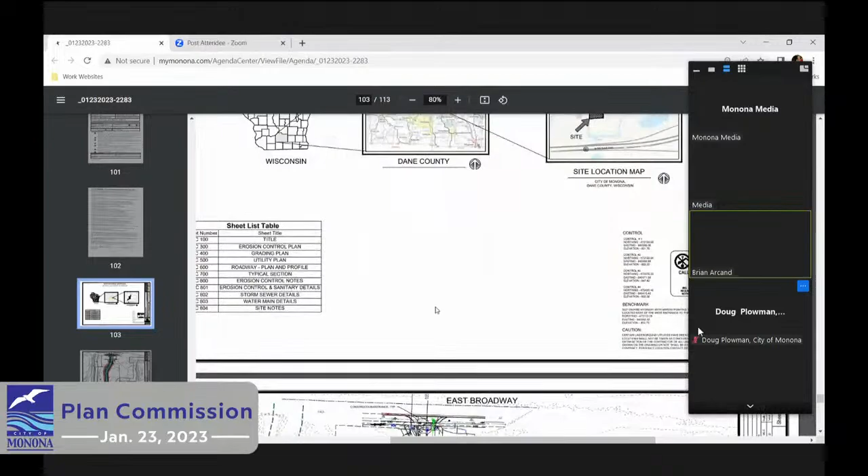Okay, so the project is located off of Broadway Avenue, west of Highway 51, near the existing Shell gas station. It is for the private drive that will serve 4 lots of an existing CSM that was recorded in 2019, I believe, which is being spurred by a development for Lot 1. So the conditional approval of the CSM required the construction of the private drive when the first lot is developed. So I'm representing White Horse, who will be constructing the private drive for this development on Lot 1. Stormwater for the private drive will be in a proposed bioretention basin on Lot 1 and will be combined with the stormwater for Lot 1, which is being designed by Vierbicher and Associates.

At this time, we had proposed public sanitary and water main, since this was serving multiple lots. But I see there were comments from Public Works, so Snyder and Associates weren't involved with the original CSM. So I wasn't aware that it had already been discussed that the city would prefer that these utilities be private. So we will head in that direction then. So there will be, but we do plan on extending laterals to Lot 4, Lot 3. We do not show laterals being extended to Lot 2. The intention was that the mains will be extended since we have no idea what kind of development is going to happen on Lot 2.

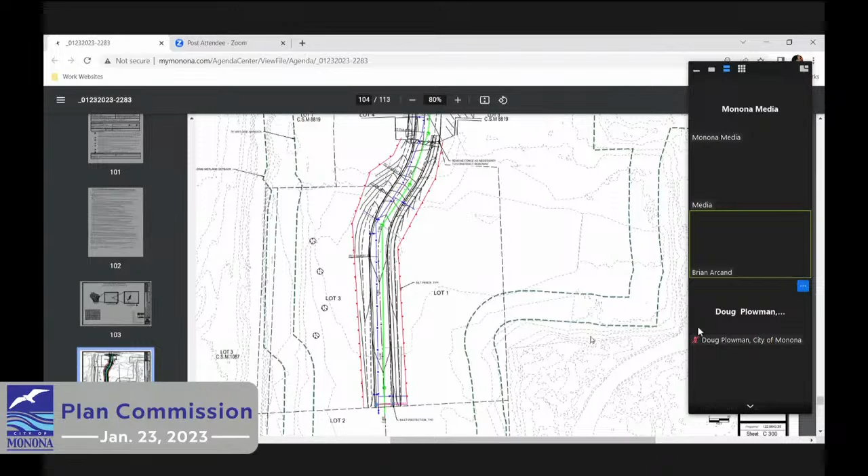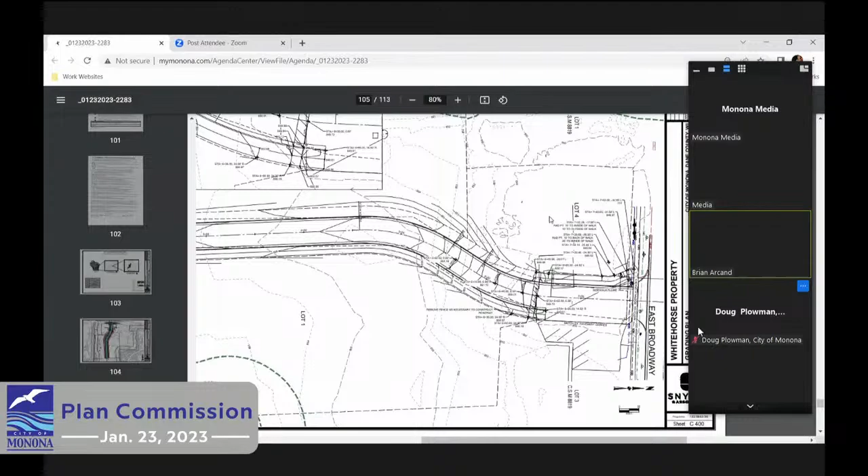And then we do show multiple laterals to Lot 1, which I saw in the engineering comments. Those were coordinated directly with Vierbicher. So that's why there's more than one lateral going to those lots. Our original design, the intent was not to affect the gas station here. And Lot 4 currently has a potential buyer who's working with a separate engineer on their layout. We tried to coordinate with them for stormwater management and grades and design, sidewalk location, that kind of thing. But they are still in the preliminary concept phase and we just didn't really get anywhere with them as far as putting a pond. We did look at stormwater, sorry, I'm kind of all over the place here.

We did look at stormwater for the entire CSM at one point, where we were showing a basin on Lot 3, but this same developer is looking at Lot 4 and Lot 3, and they didn't want to be locked into a pond location, which backed us off that and went back to looking at just Lot 1, since that's being developed, taking care of the roadway.

Now, I did see the conditional approval of the CSM included some geometrics, and I sent Doug an email regarding a 14-foot southbound lane, two 11-foot northbound lanes, and a 3-foot median. So we were looking at that this morning as well. I guess the main issue with that is it will require some coordination with the gas station, either tearing up a portion of their parking lot or adding an inlet over there.

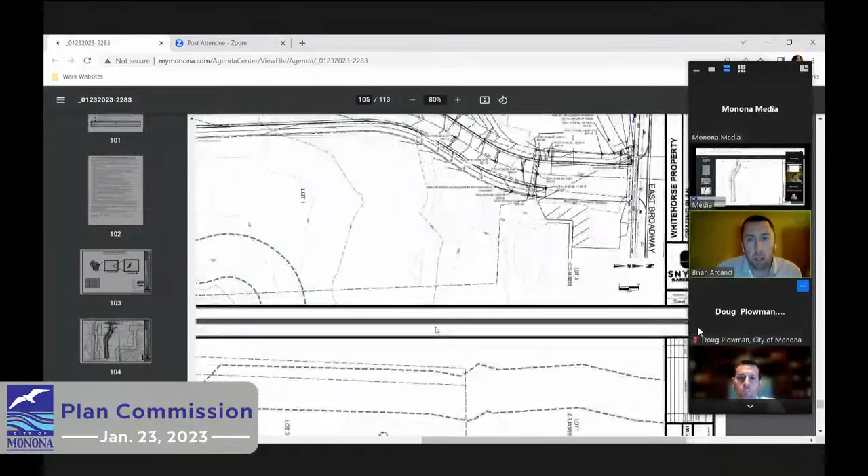So we'll have to reach out to them for some coordination issues on that. Okay, anything else? I believe that is it. I'm trying to see if I'm missing any other critical information here.

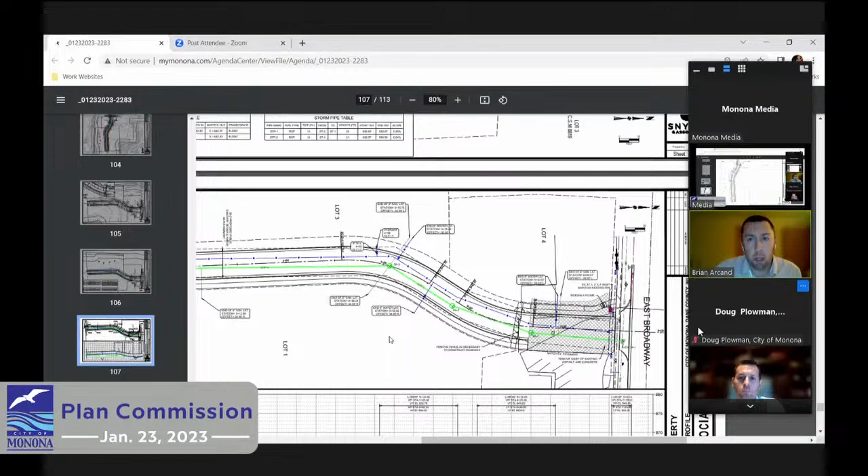No, is there any questions I can answer? Well, I'm sure we will have questions, but we'll wait for the consideration of action before we get to those. Okay, so is there anyone else here to speak on this during the public hearing portion?

Okay, then we're going to close the public hearing.

And we will go to 7F, which is consideration of action on the request by White Horse Properties LLC, represented by Snyder and Associates, Inc., for approval of a zoning permit for a new private drive for the previously approved CSM 16430, located approximately 1208 East Broadway, case number 2-002-2023. Doug, would you like to?

Yes, thank you. Can everybody hear me okay? Yes. Great, thank you. So this request is to construct a 50-foot private drive into the White Horse Properties, allowing for access to proposed sites from East Broadway.

The parcels are zoned Community Design District, and a zoning permit is needed for the construction of the roadway proposed. The location and overall design was captured during the CSM process, where this private drive was delineated as Outlot 1, with final designs and engineering before you tonight.

The staff report included in the meeting packet includes details on the main discussion points, including the design, landscaping, and lighting, as well as feedback from city staff. I particularly highlight feedback from the Public Works Director as it relates to maintenance, utilities, and signage. His preference is that this all remain private and be the responsibility of the property owners and not the city—specifically, that this be a private drive and not an additional city street.

I also wanted to share that this has been posted as a possible consideration of action. The reason is that the road was discussed during the CSM approvals, and this must be considered prior to the North Point PIP returning to the Plan Commission. If the Commission needs revisions or more time, this may return for further consideration, possibly at the same meeting, as a consideration of action for North Point.

I've included a suggested approval in the staff report with conditions of approval if you feel that's appropriate. Additionally, tonight we're joined by Josh Straka from Strand. They provided the review letter you'll find in your meeting packet, and he's here to answer any detailed engineering questions you may have. Thanks. Thank you, Doug.

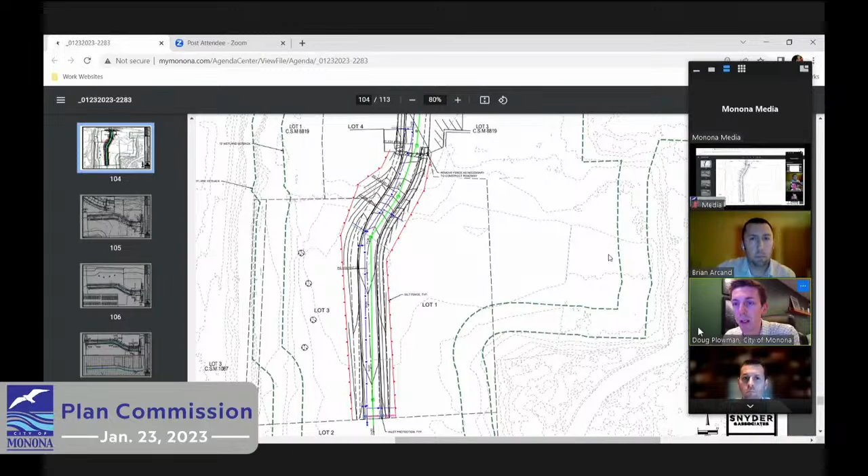Chris, would you like to start us off? Sure.

It's clear you weren't given the copy of the approval from when we approved the 50-foot private road, because there was a plan that showed how we were going. You can't hear online? It seems like you're muted. Hello, test 1, 2, 3. Hold on, the media seems muted overall, so I don't think it's your mic—it might be the media. How about now? Yeah, we're still struggling to hear. I'm sorry. Is our room muted on the media? I don't know. There we go, that's working for me. Can you hear me now? Yes. Can you still hear me? Hello? I can hear you, Chris. You can still hear me okay?

Yep. Okay, so apparently you weren't given the approval from when that 50-foot road was approved, because we spent a lot of time looking at what the configuration would be at the gas station. Of course, our concern was with what's being built behind there, plus what's to come. There was going to be a lot of traffic, and we certainly didn't want, for example, that angle parking backing up against the flow of traffic into the road.

So Josh, this is probably new to you, but I suspect you've seen this drawing. It was our best effort to try to be sensitive to the gas station but still have a fairly safe roadway there. We did talk to everybody, and what we ended up with was those 2 angle stalls could work for some employee parking or something like that. They're certainly not good for visitors. But there's quite a bit to figure out down there.

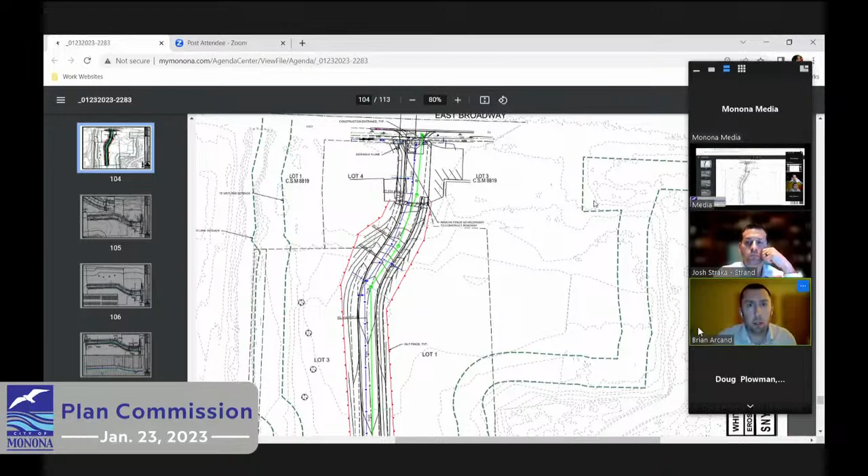Okay, quick question for the group. Is this a 40% then, because it's considered a redevelopment? Is that what everybody's classifying this as? I believe that's what we were looking at after talking with Darren Pope. Yes. Okay, well, but if Darren's designing it, then Josh, you'd be reviewing it. Yeah, I think most of that area is gravelled back there. It has been used for a lot of different things, so I think that'd be reasonable to say it's a redevelopment.

But we'll need to make sure that the owners of Lot 1 are aware that they're taking care of all the stormwater for the road, which is fine. If they compensate somewhere, I don't think that matters to us as a city, but they would need to know. Yeah, they're aware of that. They are aware of it. And that you're taking all the water. Yes, well, it was their suggestion. Okay, who are you with? With the White Horse property. Okay, great, terrific. Yeah, they're aware of it, and it was actually their suggestion.

Okay, all right, so we got that, Josh, out of the way. So then all we got to do on the bottom end is make sure we handle that drainage for now. Our bottom end, I mean north end, but it's the bottom of the flow.

Okay, yeah, and then the other comments I would have, you should really look at the traffic, and your asphalt thickness might be a little light, but you got 18 inches of rock, so that probably takes care of it then. Sidewalks should be 5 inches instead of 4. They won't last at 4. And we should look at terrace trees and some type of lighting.

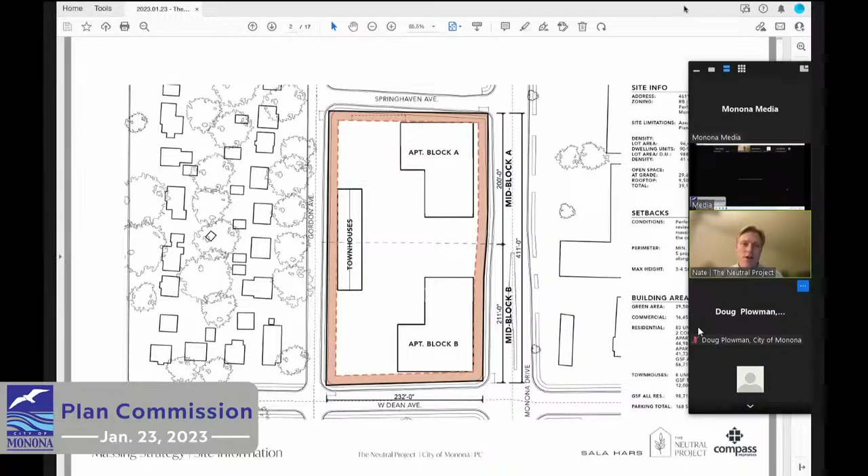So I'll get into the presentation and then I'll call out a few team members along the way, the first one being Janet from Silvernail, who is going to be presenting her landscape plan and planting schedule. As we know, this was one of the items at the last meeting that was a point of discussion where we didn't have all the answers. So we wanted to come back with a more formalized plan and present to the commission and get your opinion. I'll turn it over to Janet.

Hello everyone, thanks Nate. I will just run through some highlights of this, focusing on the areas you asked us to consider at the last November meeting, and any other changes that came about from the architectural or site civil revisions. So we have added a dog run area right here. Can you all see my cursor? The dog run would be an artificial turf material, and we'd have a drain that would drain below ground to that rain garden in the garden space. So that'll be integrated with the civil design.

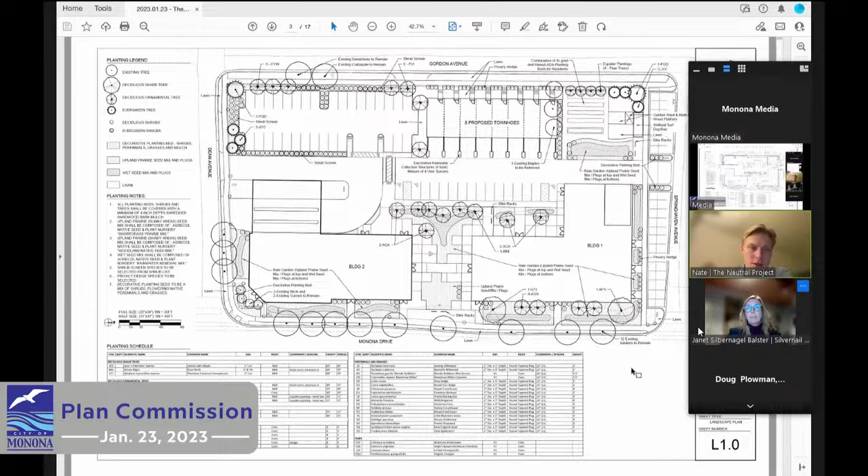Once we're done with our presentation, we'll be intrigued to hear the Plan Commission's opinion on our planting schedule, but we'll wait to receive those comments until we're done with our presentation. I think Dylan is in person, so I will turn it over to Dylan to present his page.

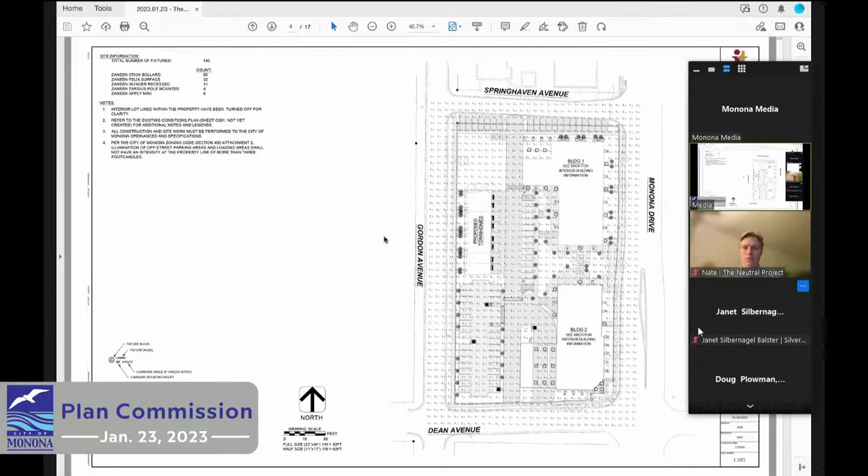So this is our second crack at the lighting plan. We came with a preliminary lighting plan for our pre-hearing PIP. Basically, the intent here is to meet the code, which is no more than 3 footcandles at the property line, while also providing enough lighting within the parcel for both vehicular and pedestrian traffic.

We also worked with our architect to make sure we were meeting their expectations from a lighting standpoint for the entire property. So we've got a mixture of bollard lights, wall packs, sconces, and a few street lights as well to provide the lighting. Outside of that, I don't think there's anything super specific we need to talk about unless you guys have any questions.

Thank you, Dylan. We'll come back to Dylan as well.

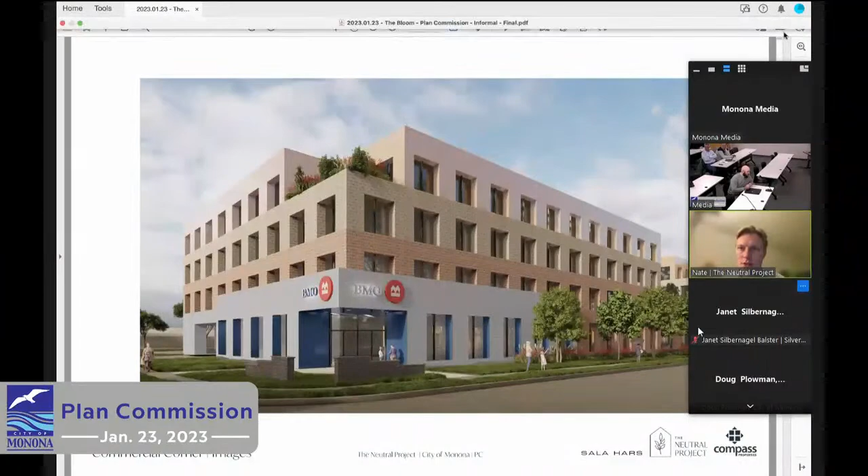Then we just have one presentation on the facade, and we had a chance to meet with BMO after the comments we received from the commission in our last meeting. We were able to convey to BMO that a two-story massing and a two-story sign was not acceptable nor compliant with the current code of Monona signage.

So we went back to the drawing board and came up with a new design, which you'll see in your packets and on the screen here. One thing BMO stressed to us was they need to have some sort of presence along Monona Drive, and they wanted a differentiator in the facade. So we thought if we continue the brick and add their blue, that would be enough for them to have their differentiator in the facade, and hopefully subtle enough for the planning commission to approve.

Obviously we're not seeking approval tonight, but we will be when we come back for PIP. So I want to hear the commission's thoughts on this facade. There's a few more angles we have during different times of day, and this is an angle right along Monona Drive.

And I think we have Sala Hars here. Doug, are you on? I'm here, yes. Oh, perfect. If you want to add any comments, that would be great.

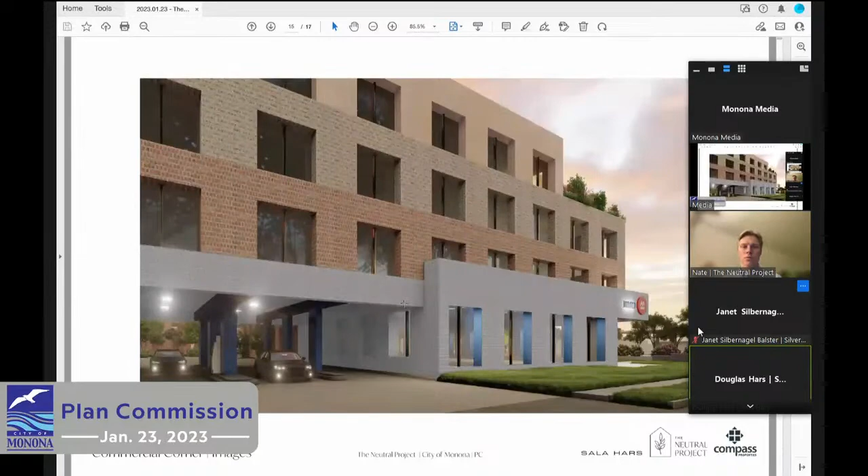I think the major change is that the blue being in such contrast to the rest of the building palette and material color, we wanted to turn that inward, let's say on inward facing edges, not on the main facade, but rather carved in either to the entry or to the openings, the windows. This way the facade doesn't act as signage, but rather the materiality of the facade itself blends much more with the materiality of the rest of the building, and the signage is simply signage attached to that.

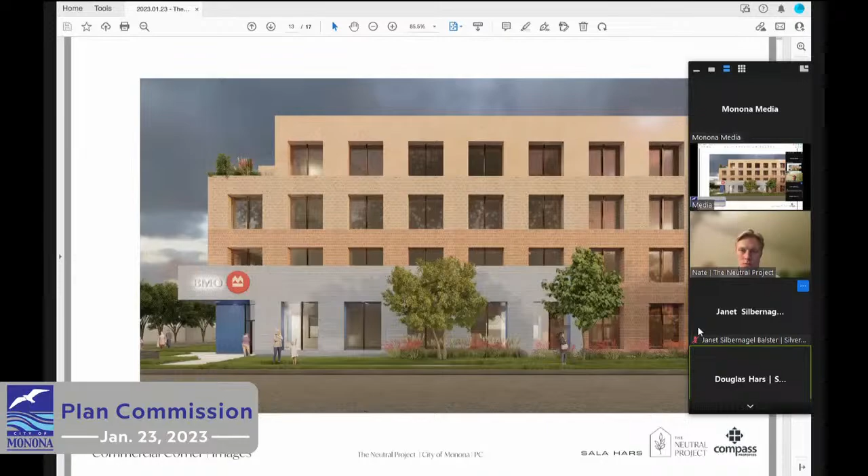Yeah, I think that's our complete presentation. Thank you for having us, and welcome as many comments as you guys have. Thank you.

As this is a public hearing for the Neutral project, is there anyone here that wanted to speak during the public hearing portion? Seeing none, we'll close the public hearing and move to number 6B, pre-hearing conference.

Doug's trying to speak up. Oh, sorry to jump in. As part of the pre-hearing, I did receive an email just before the meeting relating to this project. Sorry I wasn't able to circulate that with the commission members. May I just give an overview of that? Sure, thank you. This comes from Marianne Reed of 5602 Winnicott Road.

She's generally concerned about the lack of planned parking for the developments, specifically referencing this project, the lack of parking at the high school, and the need for off-street parking. Also the changes taking place generally in the city and broader context, and discussions of snow emergencies and how elements like that may be handled. I can certainly share a copy of that with the commission so they can see it and read it in their own time. Okay, thank you.

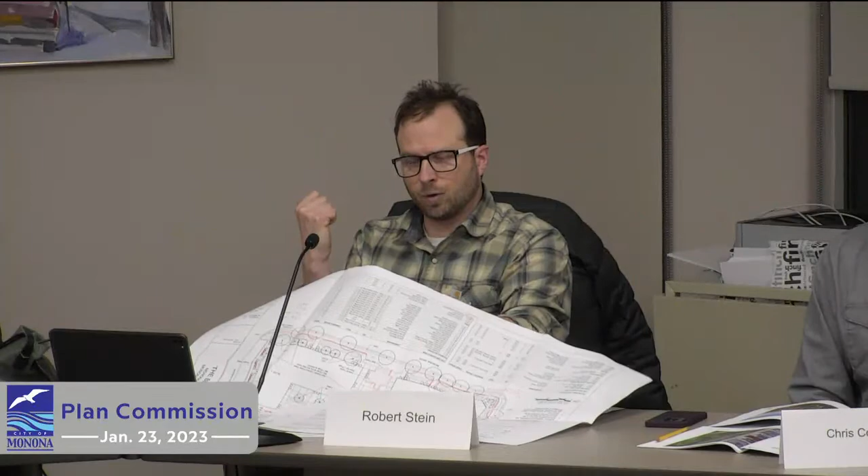That's a good question, I didn't bring the lighting plan with me. I don't know if the foot candle... is that one directional, or does it just cast one direction, or is there a fixture on the backside as well? It is one directional. In an instance like that, I don't know if there's a light fixture in that family that goes both ways, but in that location it would make sense to have alternate. Well, maybe not alternating, but I don't know if you need it in that drive aisle. But that was one question.

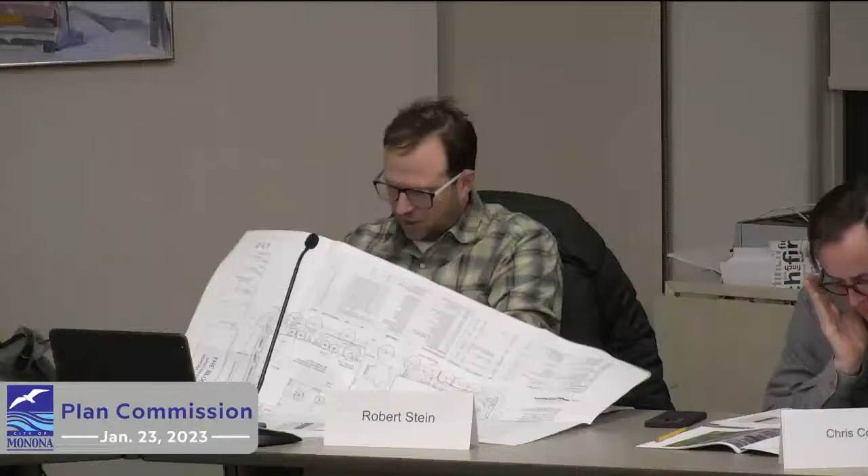And then I started looking - if I look at this long enough, I'll just keep finding stuff. On the north to south sidewalk next to the parking in that main core area, there's a row of bollards located in the sidewalk itself. It looks like wherever possible, in other locations, they're located in the landscape bed for maintenance issues, I'd imagine. But if you flip it over, you get some splash into the parking lot, and they're out of the way for snow plowing, and they'll stand up a lot better and won't get banged around as much, if that works with the landscape plan and everything. So just a consideration.

Thank you. And then, are the post-mounted ones - sorry, another one - are those going to be on raised bases? Yeah, they'll probably be at 18 feet high. With an 18-foot pole with a 3-foot base? Or, well, a 15-foot pole with a 3-foot base. Okay, thank you.

If I could, I'm sorry, I was going to piggyback on Rob's comments. I didn't mention it, but when I first looked at the electrical photometrics, I was shocked how low your light levels are through some of the main drives. We're looking at below 1 on a lot of it, up to 1. These are really, really low light levels. So I think Rob's comment is a good one, that you want to make sure you have enough lighting here so people can get about safely.

I understand we don't want anything spilling, and the neighborhood will be happy to see there's 0.1s and 0.3s spilling to the curb line across from you, so it's not a lot of light. But I'm not sure your main drive in some of those areas is really well lit. So I agree, it's something to take a look at. We're usually looking at making sure you're not lighting it too much and creating glare for the neighborhood. In this case, I think you're right, it's a little low. I would just re-examine it and see.

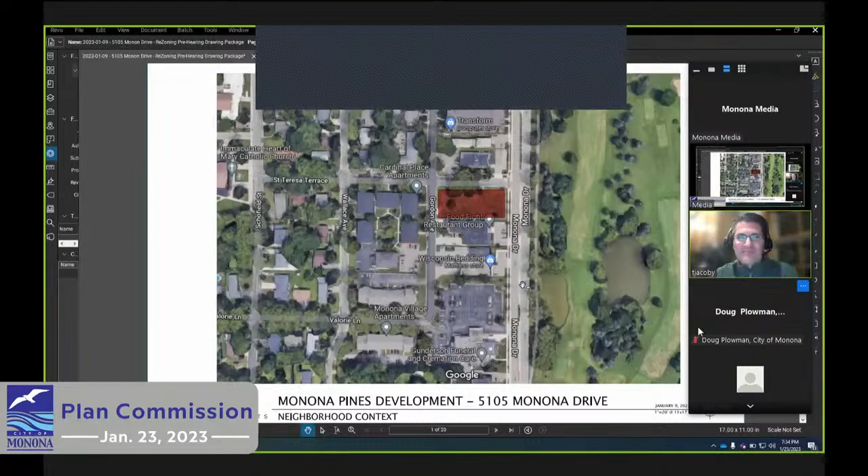Hi, I'm Troy Jacoby from JLA Architects, and I'm here to walk you through our submittal package, and also highlight some of the changes that we've made per your recommendations. What you see up here is an aerial map, and I apologize if we're cycling a little bit, hopefully it stops. In red is our site right off Monona Drive. We have great views of the golf course across the street, and surrounding our site are commercial uses - commercial uses to the north and south, and multifamily along Gordon Avenue.

Are you guys seeing things? The screen was just haywire. White - the one before that worked, that one was pure white. So hopefully now it's black. Now it's black. All right, well let me try to reopen the file, see if we'll get through this together. I apologize for not being able to be there tonight - in standard fashion, my wife was a little sick, got the COVID test, and I tested positive, so I appreciate you letting us present virtually.

Hey Doug, can you hear me? This is Mark Ott. Yes. Worst case, I don't think our presentation package is really just the package we submitted to you guys. So if Troy can't get it, worst case, I think if you have it, he could just tell you when to scroll through. Yes, I'm just pulling it up now. I can screen share. Sure. All right, well, are you able to see my screen now? No, Mark, you're not. Yeah, Doug's gonna pull it up on his computer, he can put it up, tell him when to update it. That'd be fantastic.

The next slide is the survey of the site. As you can see, it is a vacant site, so our proposed use would provide a new piece of architecture for Monona Drive. I know there's very few vacant sites on Monona Drive, so we're excited about this opportunity, and I think we have a good design that holds that corner. Next slide.

Here's our proposed site plan. You can see our building is kind of a U-shaped building. I'll just kind of walk you around all four sides of the building. Starting on the north side facing St. Teresa Terrace, we have two entry drives into our lower level parking.

We have two levels of parking, so the throat that's being highlighted right there, that's the lowest level. And then as we work our way up, we have another entry level over on the right-hand side, and directly adjacent to that is our main entry to the building.

Our street activation along Monona Drive to the east is activated with a raised terrace or patio space. One of the comments about that Monona Drive facade was about landscaping and how the building meets the street, so when you look at some of the exterior renderings, you'll notice we are proposing a planter that kind of nestles around that raised patio space.

And directly inside of that raised patio space is a fitness area and also a business area that we'll talk about a little bit in the plans.

Moving to the south facade, obviously it faces an existing one-story building directly to the south. We are showing some enhanced landscape along that facade, and we also have some revised renderings that show improvements on that facade. Then moving to the west along Gordon Avenue, you can see we've shifted the building from previous iterations, so there's a little more of a buffer on Gordon.

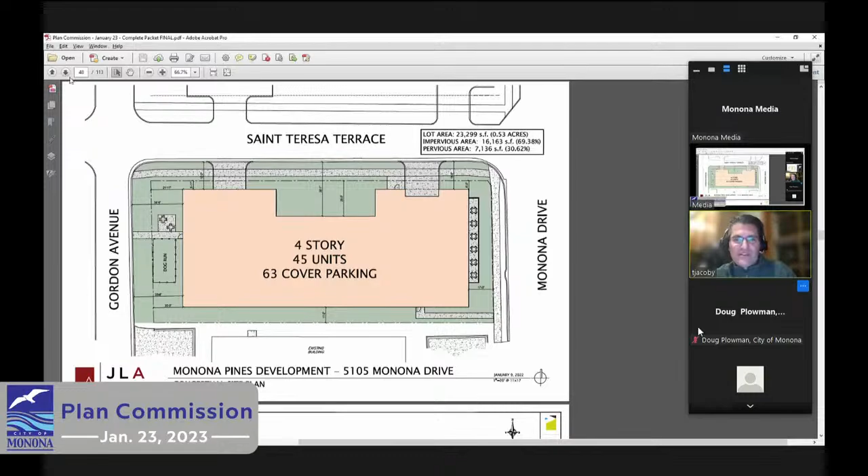Then from a green space ratio, we're still maintaining 30% green space, and that's in the scheme.

Landscape here - I'm not a landscape designer, so I'll touch on this lightly, but you can see from a landscape standpoint we are addressing all four sides of this building, and our intent is obviously to meet the ordinance as well as exceed the ordinance.

As I look through the letter, there was a mention about street trees along St. Teresa Terrace, so it's obviously something we can address as the plans evolve to the next stage, hopefully. Next, you can keep going.

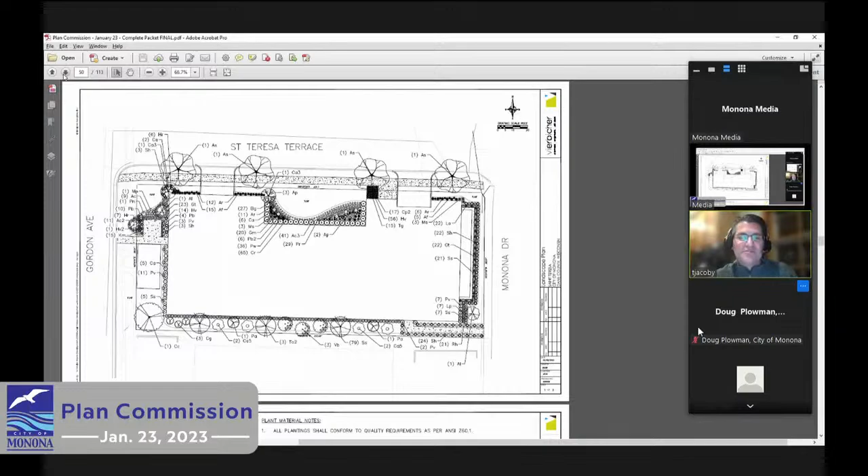So lower level plan - once again, this is our lowest level plan. Entry to that lowest level is right off St. Teresa and Monona Drive. As you enter that lower level, you can see we have refuse, bike parking, and direct access to a lot of the vertical circulations.

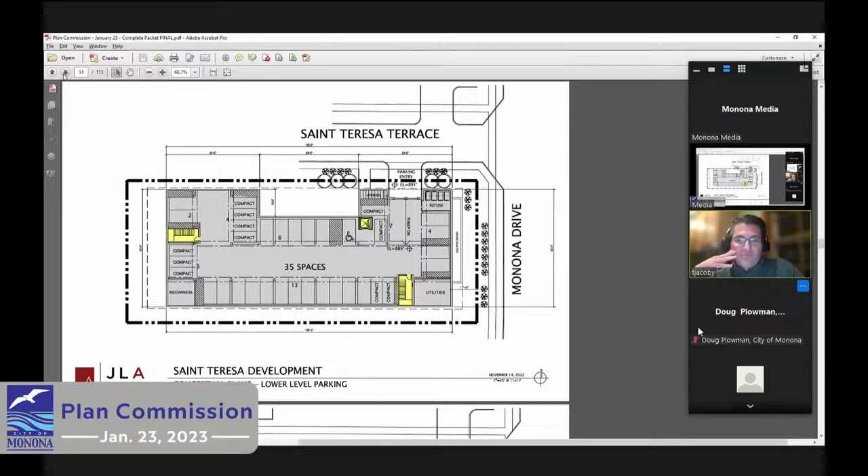Our thought process here about visitor parking is that this is probably not the right level for visitor parking. As we go through the deck, I think the next level up provides an opportunity where we could provide some sort of a vestibule, if you will. So if we're looking along the left-hand side of the screen, you can see an arrow saying ramp up for that indoor parking.

We have some initial stalls right as you drive into the building, so our thought process is, if visitor parking is something that's mandated, we would provide an additional set of security doors so that the visitor could come into this secured vestibule and then have access back out to the street and to the main door. Obviously that is a very initial thought - a lot of development needs to go into that, whether that's valid or not.

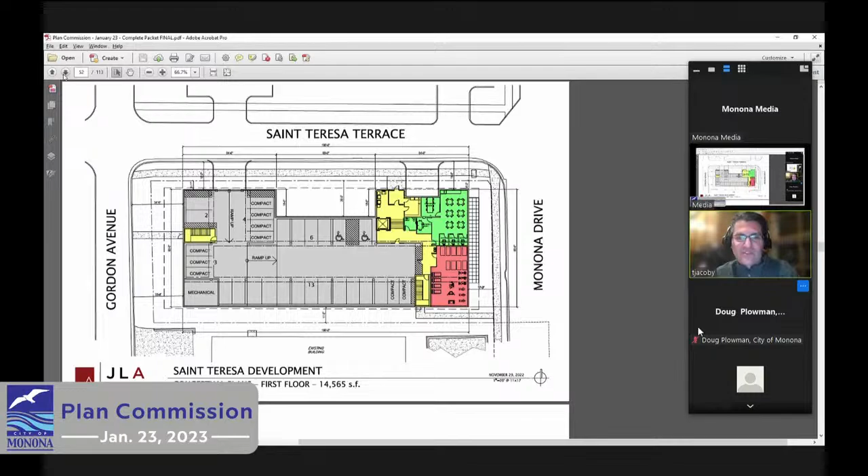But take that into consideration as you open up for additional questions. On this plan, you can see some activation along St. Teresa, and these are our amenities with the fitness area and also the business center.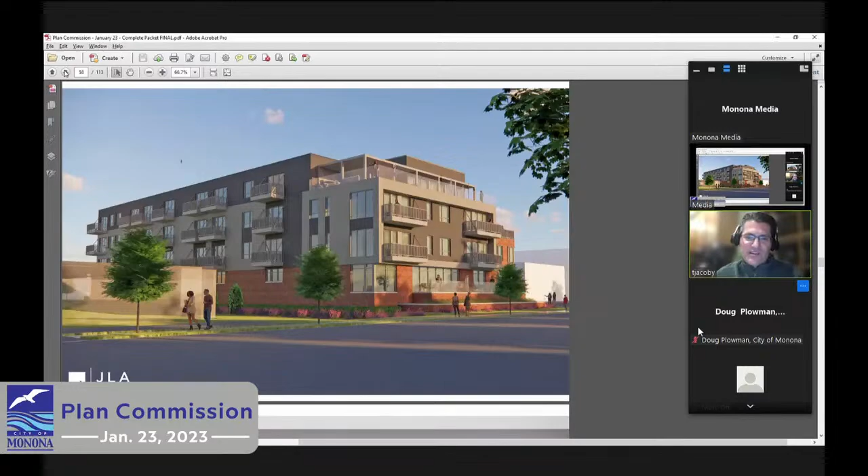Next slide, thank you. So here is the south facade, and one of the comments we heard is that it is an important, very visible facade. So what we looked to do here is really distinguish the corner of the building. From a massing standpoint, we distinguish the corner by stepping and creating that rooftop terrace. From a material standpoint, we're trying to accentuate that corner by making a demarcation between the head of the building and the body of the building.

We're really trying to make that corner an element, and you can see that dark gray material slides down and becomes a gasket between the two. We also looked at introducing corner glass again - at the 1st floor you can see that corner glass element, and we also looked at enhancing the landscaping at the base of the building.

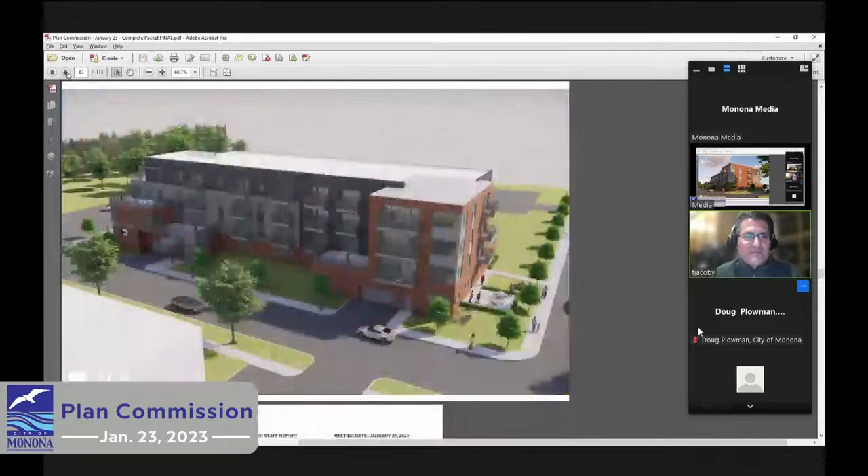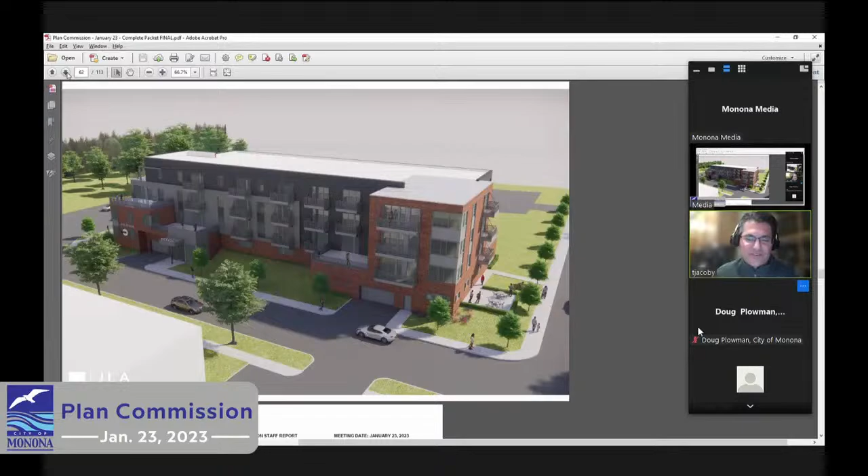Yeah, this is the last. This completes our presentation, so this is the last rendering we have. Once again, just a nice aerial rendering to show how the building addresses the street, and also how the elements of our building start to complement the surrounding areas.

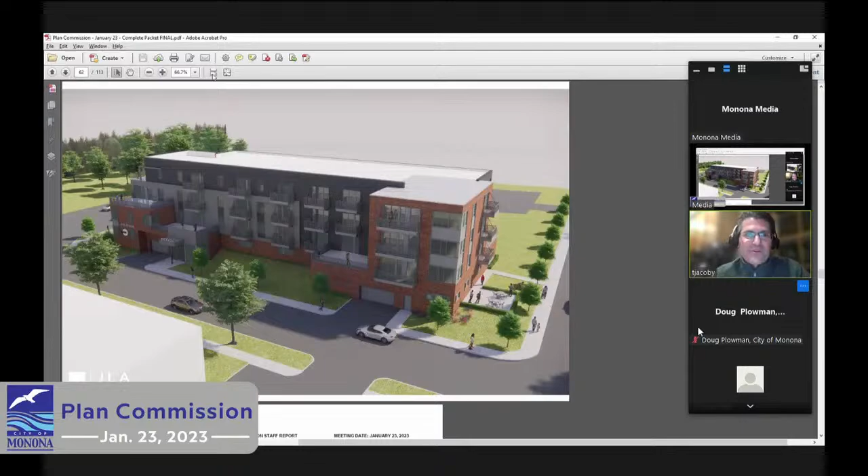All right, thank you. Thank you. So with that, we will... anybody here again to speak in the public hearing for this? No. So we will close the public hearing portion.

And go to item number 6D, pre-hearing conference on a request from Walter Wayne Development for consideration of a zoning permit for a residential building with ground floor retail at 5105 Monona Drive, case number 2-020-2022.

Thank you. So as mentioned, this is the pre-hearing conference on the zoning permit request. The request put forward is to construct 45 market rate residential units with 63 stalls of covered parking on a 0.53 acre site, bound by St. Teresa to the north, Monona Drive to the east, Gordon Avenue to the west, and commercial space, the Food Fight Restaurant Group offices, to the south.

This is the third time the application has come before the Commission. Other pre-hearing conferences were held in late August of last year and late November as well, and each time the design has evolved with improvements made. The purpose of this meeting was really to provide an interim check-in for the applicant with some incremental changes proposed based on previous feedback, in advance of a possible formal consideration.